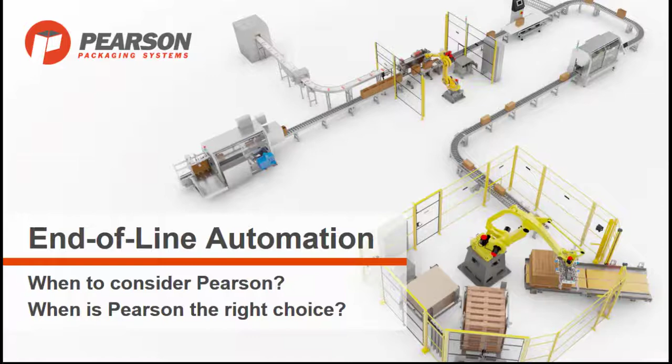Today I want to answer two important questions for you: when should you consider Pearson and allow us to qualify ourselves for your automation project, and when is Pearson the right choice for you?

Manufacturing is a big space with automation opportunities across the entire spectrum, and with hundreds of players, I can only imagine how difficult it must be for you to know who does what and how well. I only have to know our competitors, and that's challenging enough. So let's start at the highest level, and from there we'll drill into the niche Pearson Packaging occupies.

Within the manufacturing space, there are four main subsections: production, processing, packaging, and distribution. Pearson operates within packaging. Within packaging, there's primary and secondary packaging. Pearson provides equipment for secondary packaging.

So when the granola bar is in its wrapper or the milk in a carton, you now have to figure out how to get these products into a case to ship to your customers. Within secondary packaging, you have the option of using cartons or thin chipboard, corrugated fiberboard mainly used for shipping boxes, and heat or shrink wrap. Pearson's expertise is focused on corrugated fiberboard.

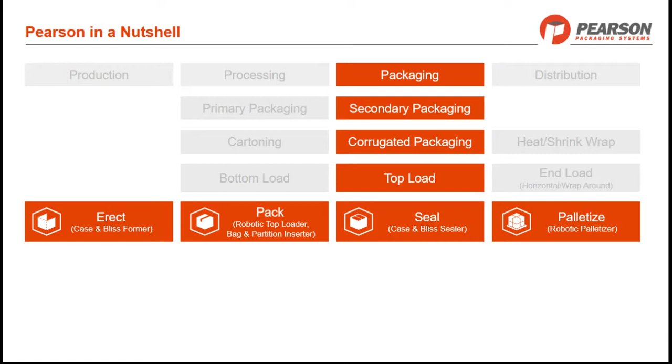Within corrugated packaging, products can be loaded into the case from the bottom, the top, or the side. Pearson exclusively handles top-loaded applications. However, within that space, we're your end-to-end supplier from erecting your cases or bliss boxes, loading the product, sealing the cases, and palletizing them. When it comes to box forming, we erect open or closed top, shelf-ready, and bliss boxes, and we do so with glue or tape.

Moving on to packing, our core competency revolves around flexible and semi-rigid product because that's when top loading really shines. It is the ideal loading technique for bags, pouches, or flow wrap products as it allows us to gently pick and place it into the container, shingle or interleaf the product, which is really hard to accomplish with other loading techniques. But we have also handled many tray and carton applications.

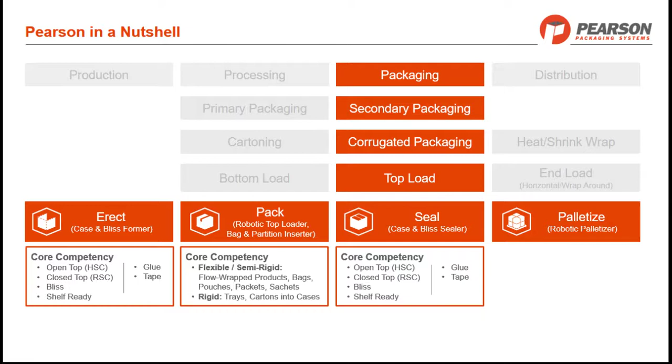We can then seal all the cases and bliss boxes we previously erected. When it comes to palletizing, we have handled a broad spectrum of products from cases to totes, bags, and drums. And since we're focused on end-to-end solutions, we also offer turnkey solutions. In fact, we have a separate business unit called Pearson System Solutions Group that handles complex integration projects that generally require not just project, but also site management.

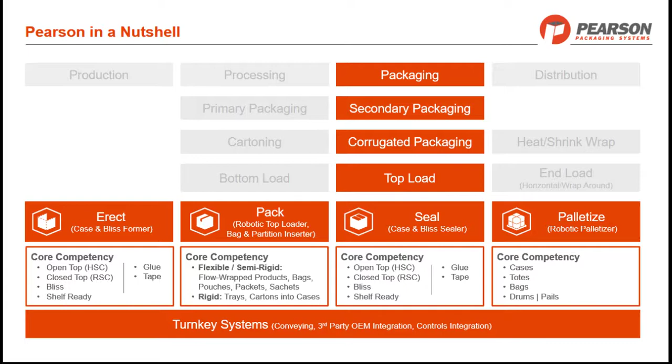And since pictures are worth 1,000 words, I'm going to be quiet for now and let you watch a quick video highlighting all the capabilities we just discussed.

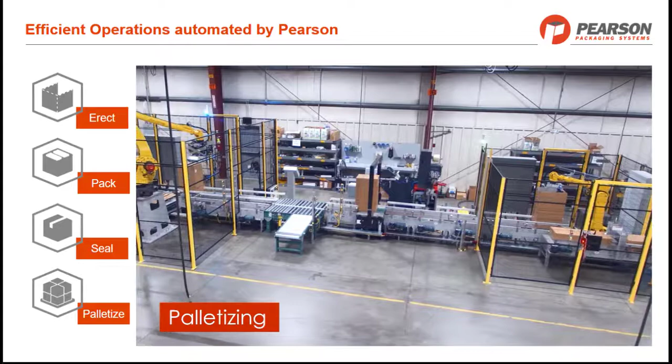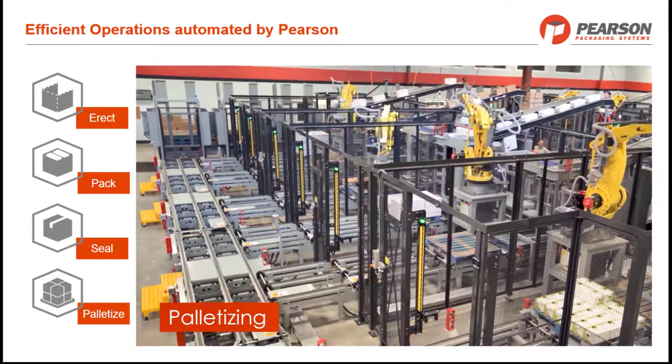Okay, so now that you know for what automation applications Pearson is a good candidate, let's dive into what makes Pearson special and when we are the right choice for your needs. But before we do so, I want to quickly go over some basic stats, simply to let you know that when you stack us up against our competition, no matter what, we're a safe choice.

We have been in business over 65 years with robotic integration experience for the past 30. By now, we have deployed over 21,000 machines. The primary industries we serve are food and beverage, personal care, household and industrial chemicals, and distribution and warehousing, including e-commerce. We were one of the first companies to adopt PackML as a standardized programming language, so you can expect that for all of our machines.

We are standardized on Allen Bradley for our PLCs and FANUC for our robots. We are a FANUC certified service provider, which means we can service the robots in our machines ourselves, and you don't need to call in a separate resource.

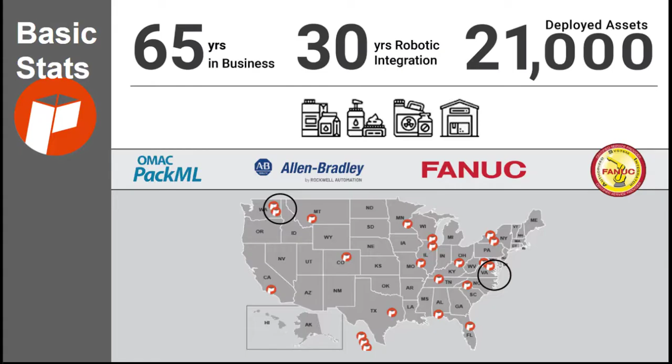So let's explore when Pearson offers you unique benefits. First off, when you're looking for a single source supplier, as we discussed earlier, you can rely on us for your entire end of line, from erecting all the way to palletizing and integration.

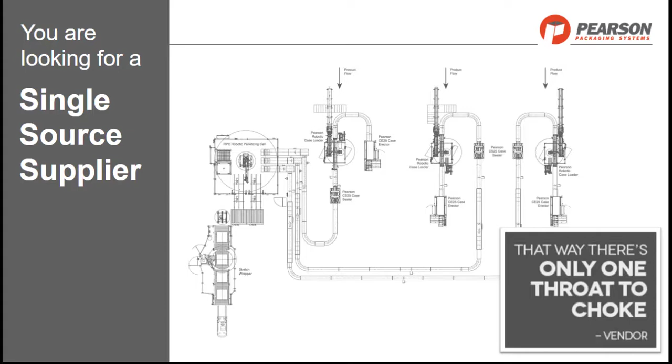What does that mean for you? Well, you only have to deal with one contact and one throat to choke in case something doesn't quite go as planned. But in all seriousness, it does save you a lot of time, resources, and a lot of finger pointing.

If you need to support a 24/7 high-volume operation, look to Pearson as well. Both our machine designs and our service support are optimized for that environment where downtime is not just extremely expensive, but also poses a threat to fulfilling your daily throughput requirements. For that reason, a lot of advanced features are standard on the machines.

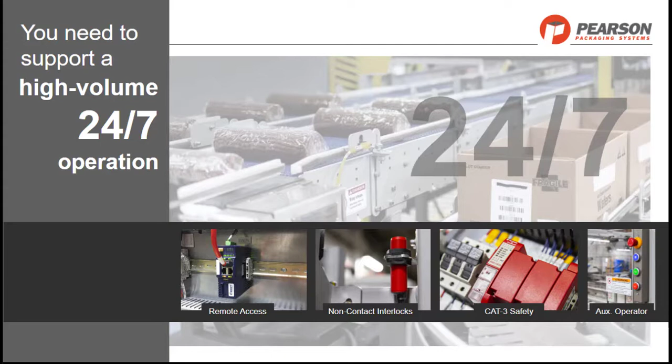We don't want you to have to upgrade, but instead get a reliable and easy-to-use machine right from the get-go. Remote access is a great example. If it's an upgrade, you may opt against it. But since it comes with the machine and all of a sudden you need to take advantage of it, you'll be glad you have it.

The next situation centers around the machine users. Do you spend too much time training your operators on setup, fault clearing, or changeover? Or does your maintenance team have to do the changeover? If you have high operator turnover or deal with language barriers, our intuitive HMI can really help you out.

What we call our user-centric design is truly what it says it is. In an iterative process, we observed users and optimized the machine and HMI around their struggles and physical limitations. Now you find highly graphical instructions, the navigation is simplified, and interactions on screen are already familiar because they are modeled after common website design principles.

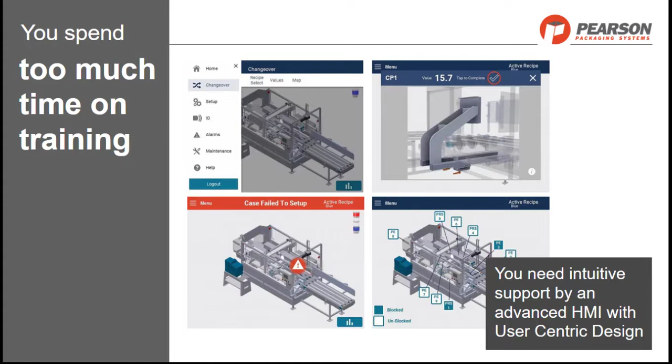Did you ever need a piece of equipment fast? In general, I would say our lead times are very competitive on all of our equipment, but for case erectors and sealers, we can deliver in as little as 30 days. We call it our streamlined lead time program, which is based on limiting customization options and having a stocking agreement in place with our suppliers.

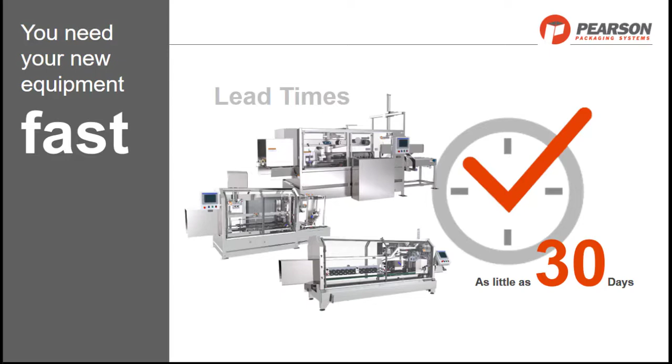But you don't have to worry about the limited options. There are still about 200 options per machine to choose from, which basically covers about 80% of all applications we have ever been asked to accommodate.

The last point I want to address could be a real showstopper for you. You need to automate, but you don't have CapEx available. Maybe the current pandemic put all spending on hold, other projects received the funding but not yours. Whatever the reason may be, we can help you.

A large portion of our portfolio is also available as machine as a service. That means you don't pay for the machine because we retain the ownership. You don't pay for the installation, initial training, or any spare parts for the life of the machine. You simply pay per erected, sealed, or palletized case, which now makes it an operating expense.

It is a risk-free program because you're not tied to any minimum case output or certain amount of years in service like a lease would. You use it as much as you need it for as long as you need it.

You really have ultimate flexibility, and while the per case price might be a bit higher than if you bought the machine directly, it is very reasonable. And don't forget, in this model, if the machine doesn't run, we don't get paid. As I said, it's a highly flexible and no-risk purchase option.

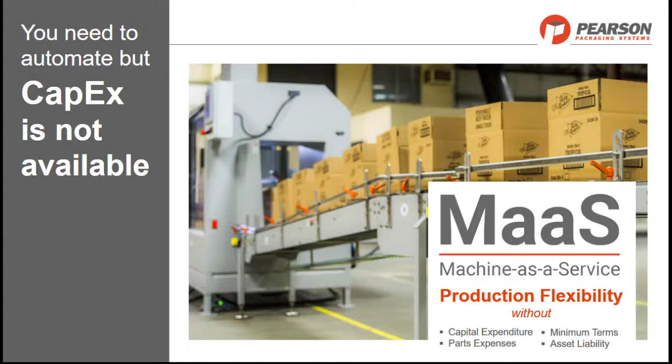With this, I want to wrap it up, and I hope I leave you with a good idea of what Pearson offers and when you should absolutely allow us to bid for your business. Now I'd like to say thank you, and I look forward to hearing about your end-of-line automation projects.